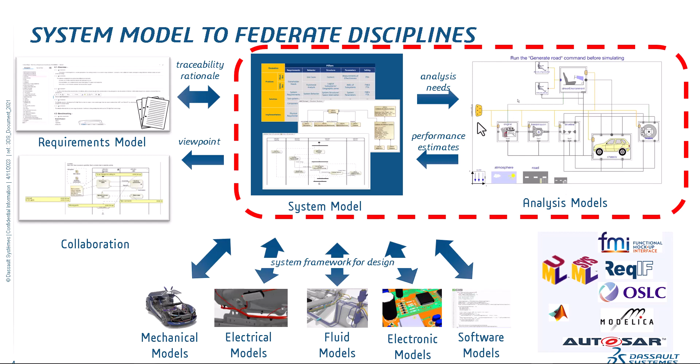We also integrate with the design for model-based design continuity, digital continuity in mechanical, electrical, and Dymola supports two roles here with multiphysics design. It leverages design for analysis and also allows you to do performance characteristics, again in a multiphysics environment.

One more slide on SysML, because that's what we use for system architecture modeling, and there are multiple views. Why are those views important? Because we start from user needs analysis in order not to miss what the user actually wants from the system. There are use cases to capture user needs and scenarios, how they are supported.

As a result, we come up with system requirements, which we satisfy with solution architecture, alternative solution architectures in block diagram, internal block diagram, and then also the behavior side, because systems could be stateful. How they react to events and what they do can depend on the state, especially in electrical software systems. So there's state machine, and functions as activities allocated to the structure, especially for software-intensive systems.

So there's definitely logic and functions in software, which is again allocated to the hardware. That's the main parts of SysML, and as you can see, a lot of analysis is needed to come up with the optimal solution architecture and to clarify requirements. For that we can leverage multiphysics simulations coming from Dymola, and Dymola can leverage system architecture coming from SysML.

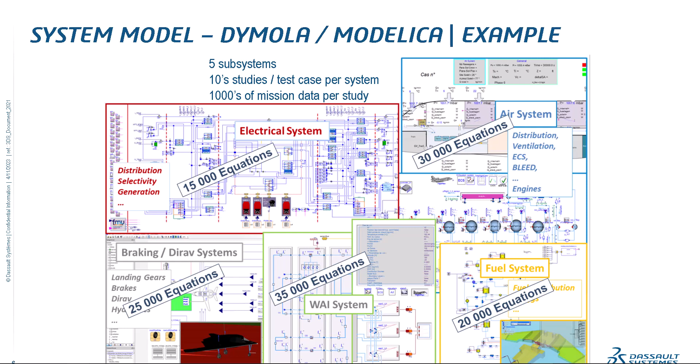So this is precisely what we want to address with this integration of systems engineering and system simulation, to have that continuity between the interfaces, from one silo to another. So talking about that integration point, as an initial step, let's talk about the MBSE maturity model from the simulation perspective.

Then we have system architecture in a single place, that is SysML. We captured already system architecture, and that's nothing more than system requirements, system architecture requirements, like functions, parts, interfaces, what we need to have. It's not what we have to do analysis, but what we need to have as a final system. So that's what we have, and then we can execute.

Why we execute? First of all, to validate the logic, executing SysML. Some people say why would you simulate SysML, but it's not about simulation as multiphysics or something like that. It's actually just to validate the logic. And then the next step is to run in the context of the analysis performed by dedicated analysis tools like Dymola for multiphysics analysis, in order to verify those requirements based on system architecture. That's the fourth maturity level of MBSE adoption.

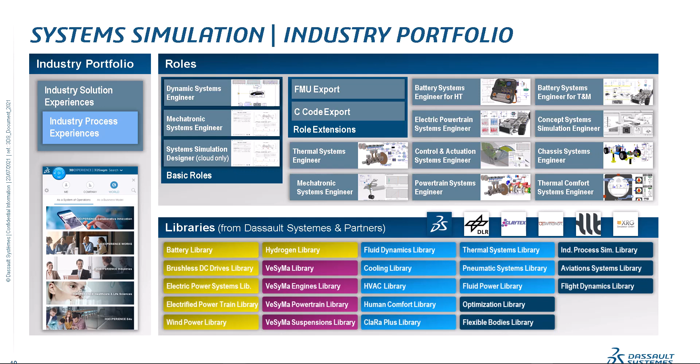Okay, and then one of the examples that we are going to show today with our video is about the battery electric vehicle, to be precise, mostly the charging of your battery. The use case is that, based on the requirement, the charging of your vehicle has been changed from, for example, 40 minutes to 20 minutes. So this was a requirement that you get, for example, from a stakeholder, and you decide to build up your system model.

So from the perspective of the previous workflow, we start off with importing the Modelica connectors into Catia Magic, and then you build up your system architecture based on the use case. Here I'm talking about the electric vehicle as a whole, but one of the sub use cases that I'm interested in is the charging behavior, right? For that use case, I have my system definition here, and if you look closely, the internal block diagrams from Catia Magic and the block definition in Modelica look the same. I'm talking from the interface perspective, not from the physical point of view right now.

So this is the benefit that we want to take, to have the synchronization between Catia Magic and Dymola here. So here we are translating the subsystem or the system from Catia Magic into step 3, which is my charging behavior. Typically, when you want to do the simulation for charging behavior, you have a charger, your battery, your cable models, your thermal management system, and some auxiliaries.

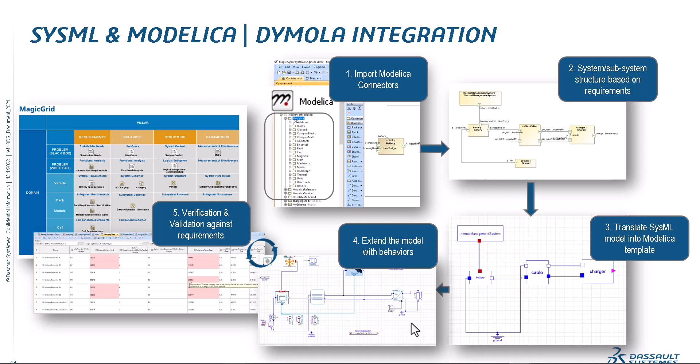Starting with the first example, let's start off with how exactly the synchronization looks like. So just a quick glimpse of the workflow itself. Let's start with the first part of the conversion. So I actually have to talk a little bit about this conversion. We've been talking about converting the SysML elements into the Modelica elements, right? So how exactly is this happening in Catia Magic?

So there is something called the SysPhS specification that you should be aware of. SysPhS stands for SysML Extension for Physical Interaction and Signal Flow Simulation. It is similar to how we have got open standards like FMI and so on. SysPhS is actually coming from the OMG organization, and the specification gives you all the information of how you can connect requirement parameters defined in Catia Magic or in SysML language into a Modelica parameter, and how exactly a block can be converted into a Modelica block.

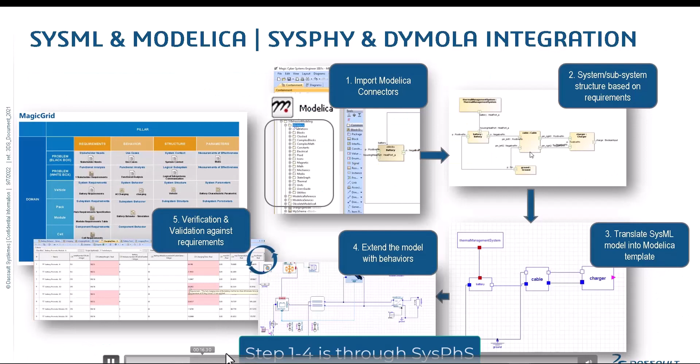So such information is part of the SysPhS specification, and this is exactly what we have done, and this implementation has been done in Catia Magic for all of us, starting from, I don't know, 21x or 20x, I assume. And you can take the benefit of directly just exporting the models. So steps 1 to 4 are the SysPhS specification that we are going to talk about.

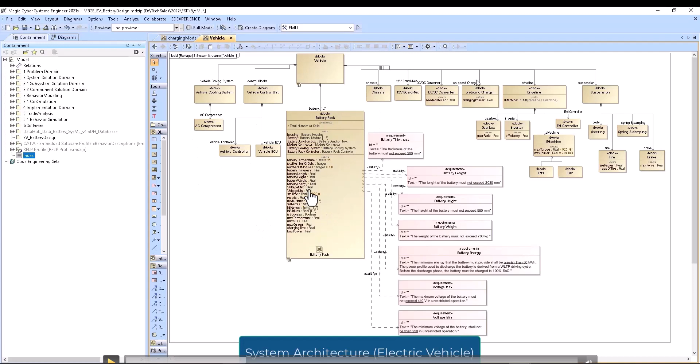So if you look a little bit at the magic grid of your electric vehicle here, I've got some information on the requirements, for example, for the charging time in this case, and the entire vehicle architecture itself. But of course, for my use case, the interesting part is the battery pack and the charger model, very few sub blocks, but still we have the entire system structure definition here, along with the requirement parameters and so on. And the sub use case out of this architecture is my charging model or the behavior model.

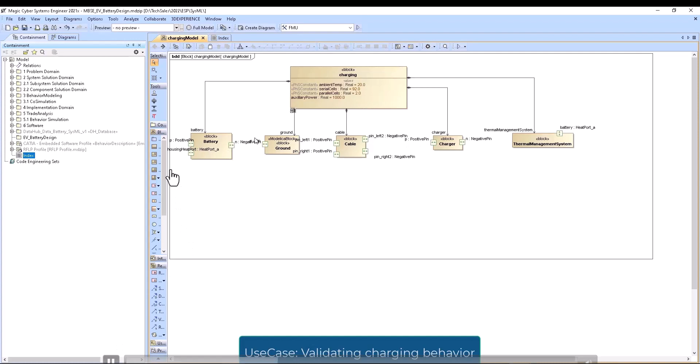And if you look into the interfaces, you have to remember that the interfaces could be imported directly from the standard libraries. So in our case, the Modelica standard library, as you can see in this containment tree, consists of interfaces for all the disciplines, like electrical, fluid, magnetic, mechanics, and so on. For me, the interesting part was the battery, and for the battery, it's obviously electrical. So we assign the ports directly coming from the Modelica standard library here.

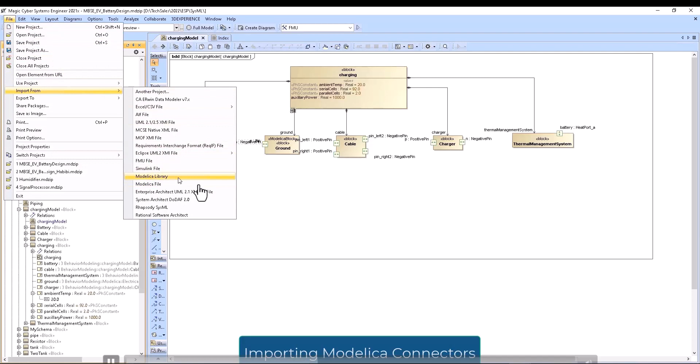You would understand the meaning once we go into the Dymola world. So here, once you apply your codes and everything, I have the block structure or the internal block diagram with all the interfaces defined between each of the components. And now what I could do is quickly translate it into a Modelica model. So this is exactly what we are doing here.

So at this level, could I add one more thing? Of course, please. Yeah, this architecture we interchange is not necessarily the complete architecture, because you might have some things which are not needed for the analysis, right? And you want to be sure that you have captured everything that is important for that battery analysis, and that's what we transfer, call it the architecture for the test case, right? I'm not sure that this is a completely good term, but it's not a bad term, because we are testing and performing analysis in some context.

So that also gives us freedom not to say, okay, now we need to transfer everything from one language like SysML to another language like Modelica, which is impossible because those are different languages, right? So there is some overlap, and that's what we want to translate based on the need of the analysis. Am I right? Yeah, absolutely.

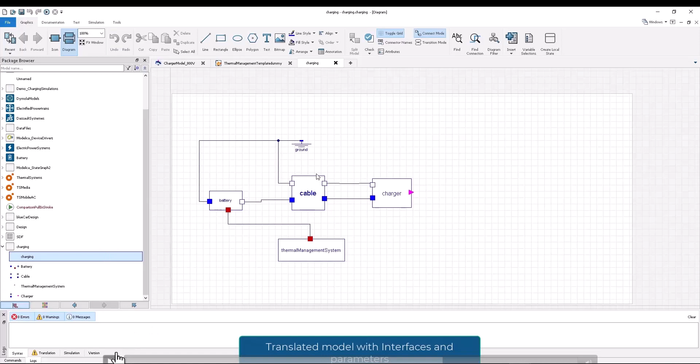And along with that, you can have the definition of your annotations, meaning the location of your components, for example. So when I bring this model directly into Dymola, you can see that the interfaces have been respected. What I mean by that is, to most of you who understand the Dymola tool, you can see that the positive pin and the negative pin are physical entities that have been defined, and the definition has been respected. This is the benefit that we wanted to take through importing the connectors precisely into Catia Magic earlier.

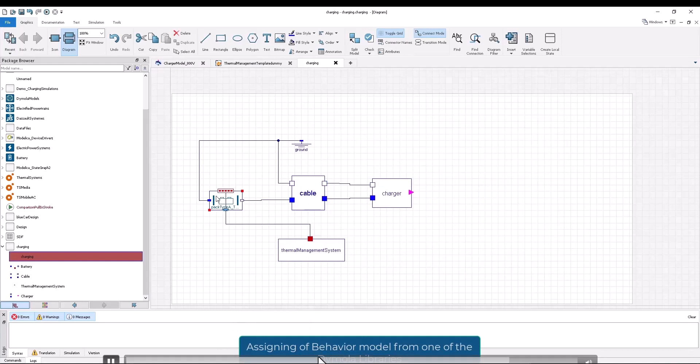And the text layer looks similar, and if we go a little bit back, I guess I missed the part where I wanted to show you the parameters. So we have a list of parameters as well, and then at the end we have the flexibility to change your models, meaning add behaviors on top of it. So I could add the battery behavior, I could add the charger behavior, and similarly I did for the rest of the system, and this is how the entire system would look like. This is very fast. That's okay.

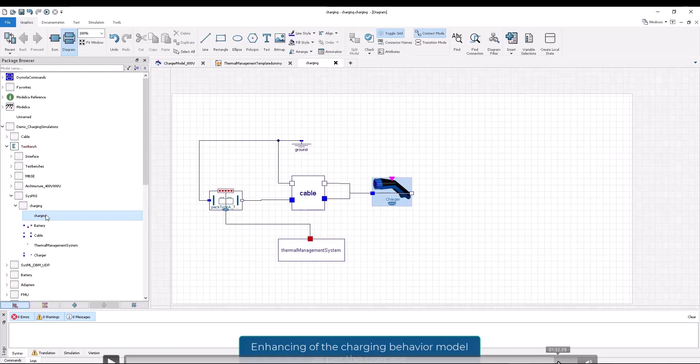So you kind of redefine those components with the existing models. Yeah. Could be library, could be already existing in the company context. Yeah, exactly. And you might think, okay, I see some additional components, so I just added some auxiliaries which were not part of my system definition, but I did extend my system here, and this is how the entire system model would look like at the end.

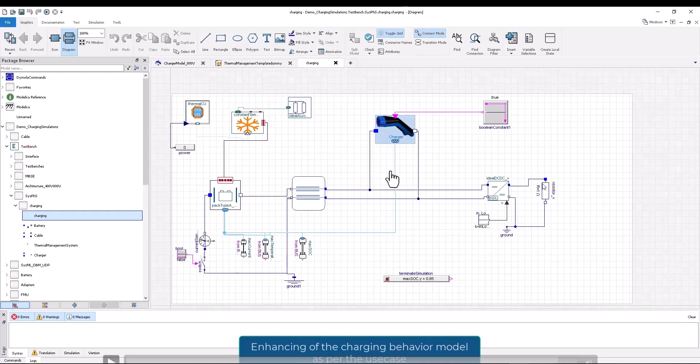Okay. Coming to the second part, which I wanted to discuss, is about the validation, right? The first part was bringing or merging SysML and Modelica together. That's good, but it has to be useful, right? So we need some useful results out of it. We want to validate the system against the requirements. So the V&V is also precisely important. For this part, there are multiple ways to do this. This is not the only way, let me put it that way.

So first, you can generate an FMU out of the system model that we just created, integrate it into Catia Magic, run the simulations and compare them against the requirements. That's one way to do it. And the second approach that is possible is a direct Dymola integration. So here again we are talking about standalone tools. Maybe this question might arise in your head. We are still talking about standalone, not the 3DEXPERIENCE platform.

So the Dymola integration means that in Catia Magic you have the flexibility to bring directly the Modelica files, the MO files, and simulate them within Catia Magic itself, and that is possible through the Dymola integration. What happens in the background is, you can execute the simulations of Dymola either with the tool, or with the scripting functions. We call them scripting functions or command line functions. We typically use them for batch simulations. So that's precisely what is being used here in this process.

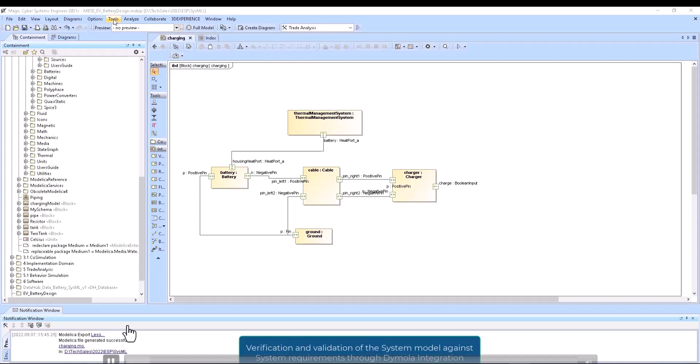So we are going to do the verification and validation part against the requirements now. Let's quickly look into the example, the continuation of the previous model. So here, this is what I was talking about. There are a couple of third-party integrations possible within Catia Magic. One of them is, of course, Dymola.

And here, once you integrate it, in the background the instance of your Dymola is executed every time you run your simulations. So that's exactly what is done. Here I have a very simple activity diagram, as you can see, and I'm providing a couple of informations, because I'm setting up a trade analysis here, which we are going to see, and in the background this activity diagram is being simulated.

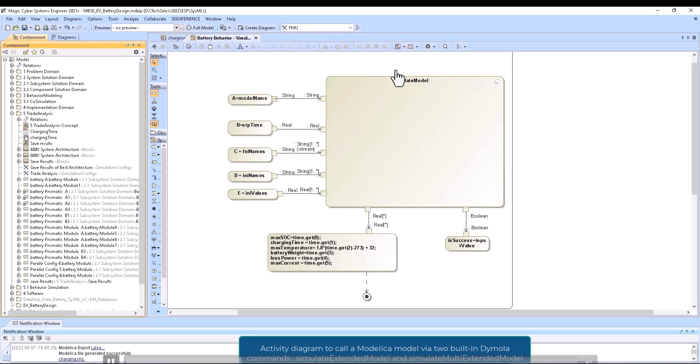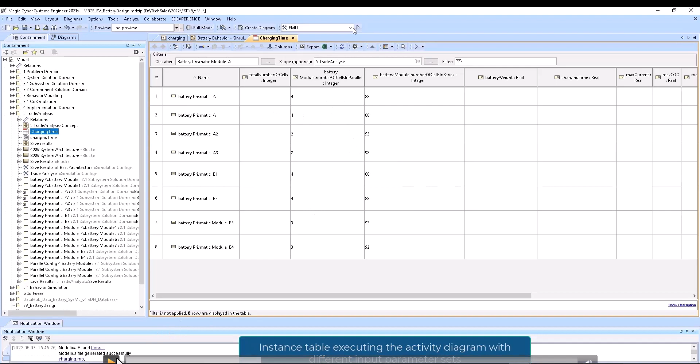So here, like I said, I have the system model ready. I wanted to check for two different variants of the batteries. I wanted to take one battery which has a better thermal performance, and see for different configurations of the battery whether my requirements are satisfied or not. And all the different physical aspects, like the temperatures, the losses across the cables and everything, are also equally important. So I wanted to make a validation of all of that. That's exactly what we are doing with this instance table that has been created.

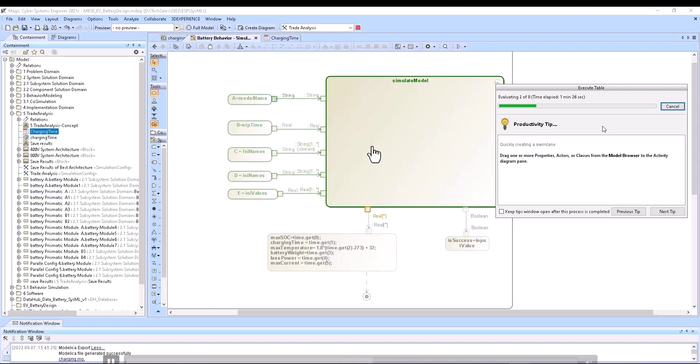So in the background we are simulating this activity diagram, which in turn consists of the Modelica model itself, executing the simulateExtendedModel of Dymola, and it is sending out all the input parameters, which is the change in the configuration, meaning I wanted to simulate it for different configurations, like the number of cells in series and parallel. So we are varying these parameters. This information is fed from Catia Magic into my Modelica model, and in the background you are actually running your behavior model. We are not talking about static simulations here, we are talking about physical simulations.

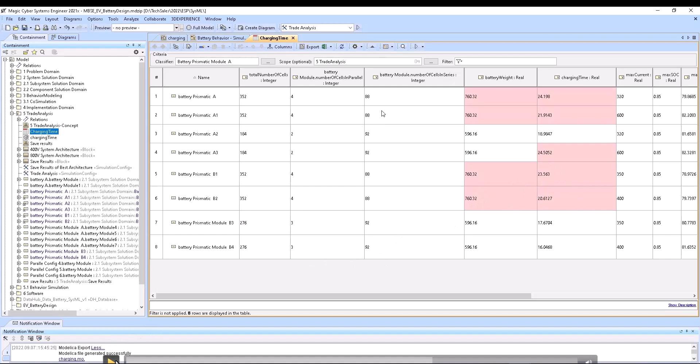And at the end of the simulations, you can see the information. For me the interesting variables were the weight of the battery and the charging time. So for example, the battery prismatic A2 is aligning to my requirements, but the rest of the configurations do not. And we have some configurations of the battery prismatic type B also aligning to my requirements for both the charging time and the battery weight. And we have, of course, other informations about the currents, temperatures, losses, and so on.

But this is to give you a glimpse of how you can take the benefit of bringing SysML and Modelica together, complete the loop and validate them against the requirements which were defined initially. Yeah, so we are bridging the gap, and I would say it's not really a gap; those languages are very popular. Modelica is dedicated for multiphysics simulation, SysML for system architecture and the transition from user needs to optimal system architecture, delivering the optimal architecture for the design with the help of simulation, as you saw. So we are connecting that in the best ways.

Those integration steps are the best we have with any other tools. And now, because we are part of the same company, we can actually work together on that, and also on proof of concepts. The ability to leverage the system engineering process from user needs to system architecture in an optimal way, integrating multiphysics models to do trade studies and verification based on those analytical models, gives us an edge in this world. It's competitive when we talk about system simulations in general, right? But we have best-in-class solutions.